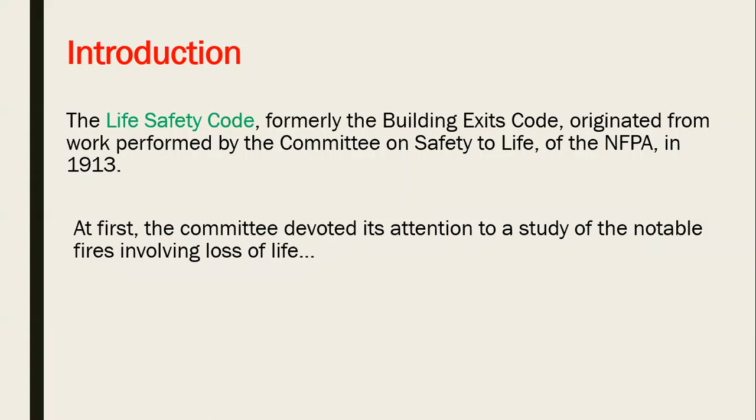At first, the committee devoted its attention to studying notable fires involving loss of life. The purpose of this, in most standards or codes devoted to the subject of emergency egress and exit, is the emphasis on escaping from fire, how to escape from fire, and securing people along the egress or escape routing to get away from the building safely, providing all the requirements to secure a safe journey to escape from buildings.

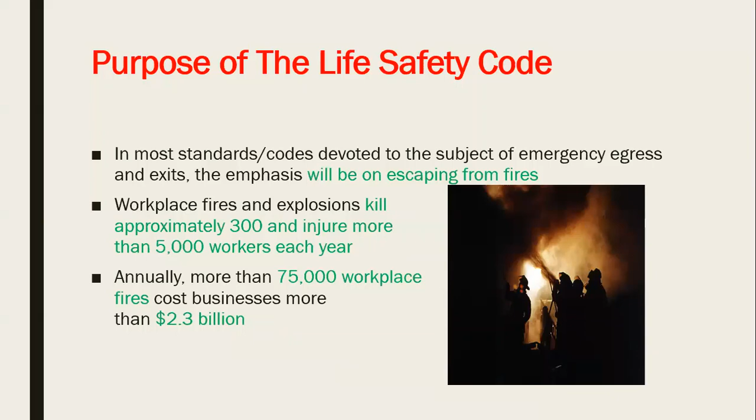Workplace fires and explosions kill approximately 300 and injure more than 5,000 workers each year. It's a big number. Annually, more than 75,000 workplace fires cost businesses more than 2.3 billion. This is statistics as per NFPA for the last editions.

So let us see how to secure the building through escape routing. It is not only for fires, but also for explosions, earthquakes, smoke, and all kinds of danger to buildings.

The NFPA code, the purpose of this and the advantage of NFPA, why it exists, is to provide the minimum requirements with due regard to the function, design, operation, and maintenance of the building and structure for safety from fire. So this gives you the minimum requirements.

And many authorities and departments of civil defense in countries ask for higher requirements than NFPA. So NFPA is the minimum requirements, but we can find higher specifications or requirements from civil defense authorities in different countries.

Here in Qatar, they say we are complying with NFPA, the latest edition, and QCDD, which has higher requirements. So if, for example, NFPA requires 2-hour fire rating, but QCDD asks for 3-hour fire rating, we have to go with QCDD's 3-hour fire rating, for example.

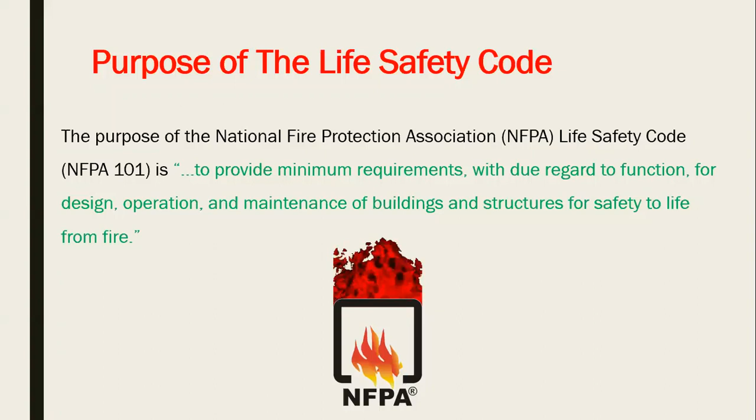The latest edition of NFPA 101 is the 2018 edition. This is the cover of the NFPA 101 section. By the way, for NFPA, you can buy it in full editions, or you can buy it chapter-wise.

Okay, let us go for NFPA 101. This one is the most state-of-the-art in terms of egress requirements, stair marking, and emergency lighting. So it talks about securing the egress starting from the stairs and emergency lights, current accepted rules concerning smoke barriers, special hazard protection, interior finishes - and we will talk about all of these points right now.

It has updated references to more than 50 codes and standards such as NEC, NFPA 13 for installation of sprinklers, NFPA 72, and others. All of these sections are related to life safety. But here, NFPA 101 is mainly talking about egress routing and escape routing.

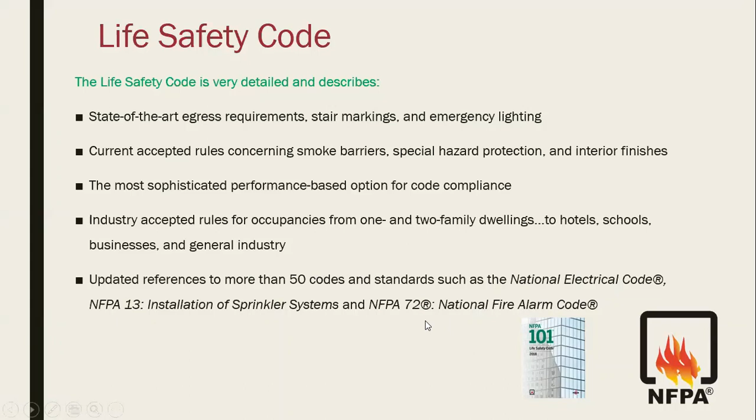NFPA 101 is more than 400 pages with 43 chapters. As you noted for the QCDD, they are talking about specific chapters within the NFPA 101 itself.

Our chapters for study will be chapter number 4, general; chapter number 7, means of egress; and chapter 40 for industrial occupancies, section 40.2 means of egress requirements. So these are the main 3 areas where we are going to talk about the NFPA 101.

What is the means of egress? The means of egress is the escape routing that we can secure within the building, allowing people to escape away from the building in a safe way.

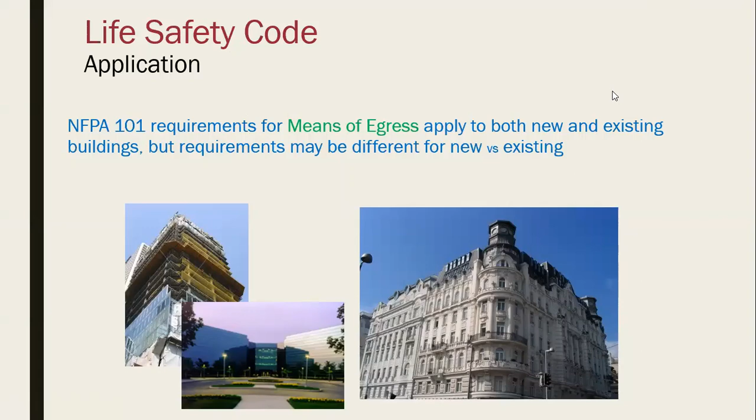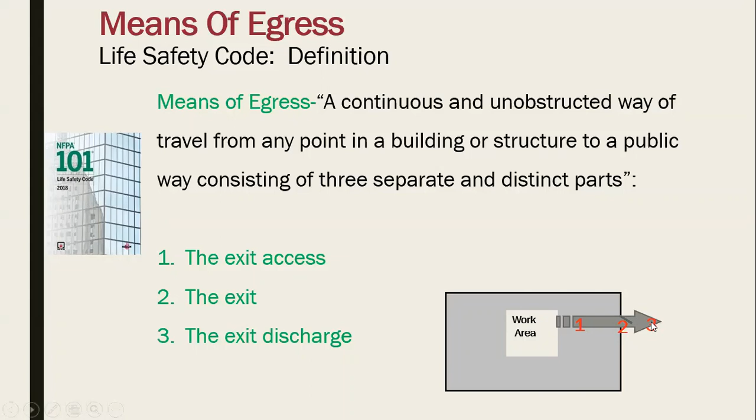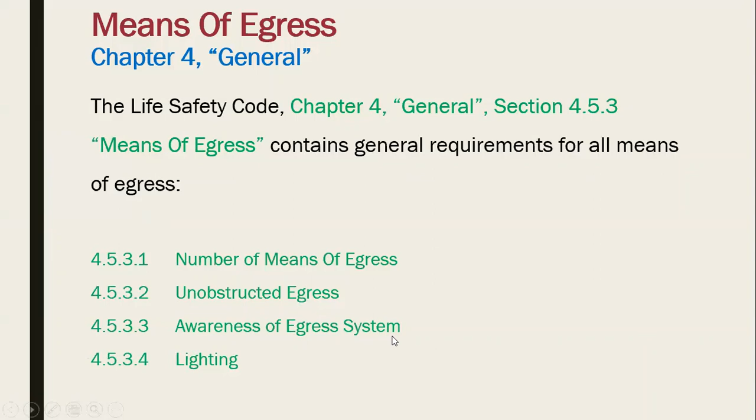Chapter number 4, which is general, will talk about the general concept of the means of egress: 4.5.3.1, number of means of egress, unobstructed egress, awareness of egress systems, and lighting.

Do you remember for the QCDD when we talk about the number of means of egress? We said it could be only one exit with some conditions, or two up to how many persons, and three up to, and four up to. Still remember?

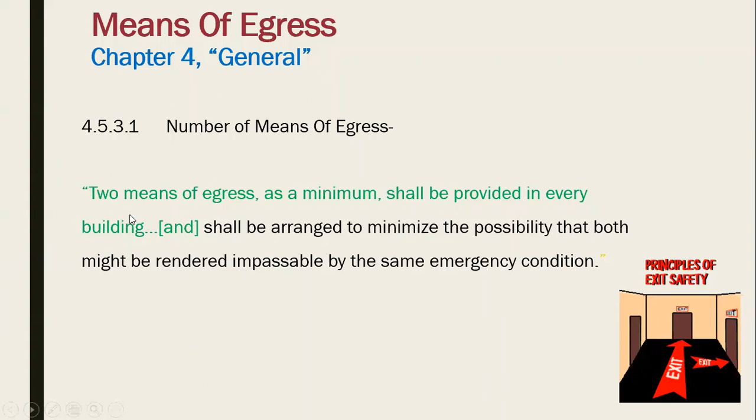Minimum number of egress is minimum 2, and this minimum number shall be provided in every building and shall be arranged to minimize the possibility that both might be rendered impassable by the same emergency conditions. So the minimum number of egress anywhere is 2, but QCDDs can accept one under certain conditions.

The means of egress should be maintained unobstructed at all times. You shouldn't have any blockage, any lock within the area, any storage or furniture, whether movable or loose furniture. It is not allowed to have any kind of furniture within the route of egress.

The means of egress from all parts of the building shall be maintained free and unobstructed. No lock or fastening shall be permitted that prevents free escape from the inside of the building. So any kind of lock is not allowed.

But we have an issue here. Many areas within the egress routing, like for example for corridors, malls, or hotels, you have an area for the exit and the exit stairs. It comes almost within the back of house area, where you have maintenance rooms, electrical rooms, etc. So these areas, you are not allowed to let the public access the back of house area, for security and to control the movement of public people within the buildings.

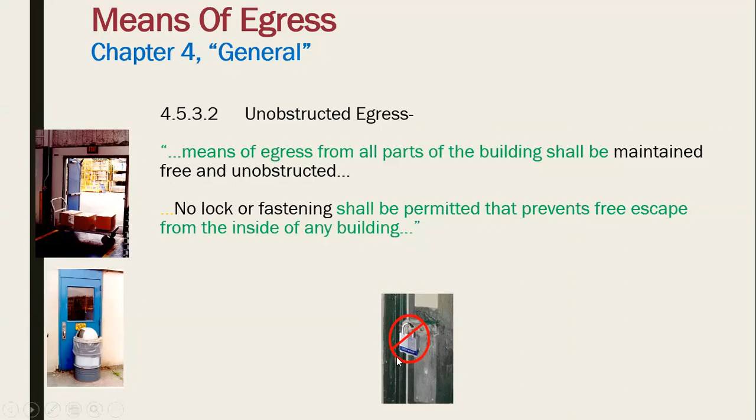So how to maintain this? As per NFPA, doors shouldn't be locked, but it is permitted under the condition that it is connected to a fire alarm system. Physical locking, like a padlock, is not allowed at all.

Awareness of the egress systems: you have to clearly indicate the exit routing, where it is and how to reach the egress area and escape routing within the building and the open space. So everywhere you have an exit and escape routing, it has to be clearly visible, and the route for every exit shall be continuously indicated.

Conspicuously indicated, which means for any exit door or exit routing, you have to show an exit sign, and it should be visible within an area not exceeding a distance of 30 meters. It has to be clearly indicated, and the text and height have to be clearly shown.

It should be illuminated. You have to show the exit, and if there is a change in direction, you have to indicate exit signs giving directional guidance for the exit. Now we'll see what the NFPA requirements are for exit routing and directional arrows.

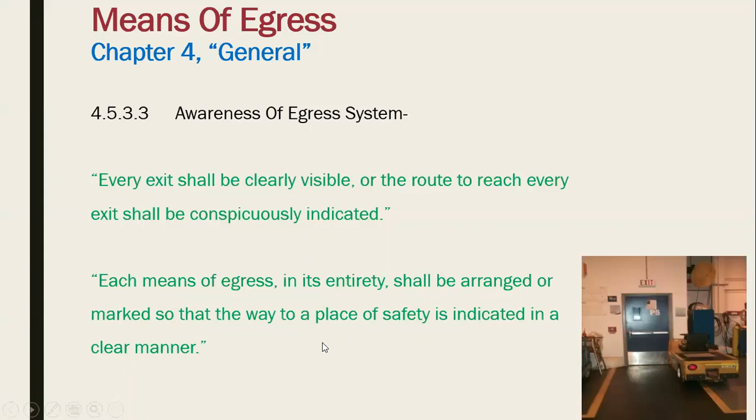This is the life safety chapter, section number 4, which covers general awareness of exits and the number of means of egress. We will give you tables that can calculate the number of egress routes depending on the occupancies.

Moving to chapter number 7, which is the core of NFPA 101, called the means of egress, consisting of 15 sections.

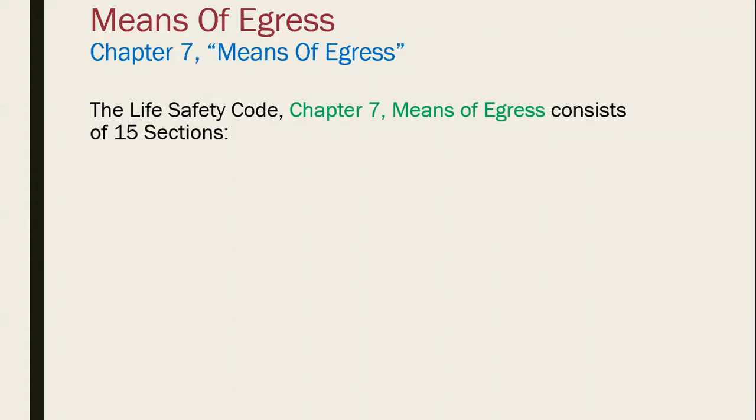First, in general, what is the means of egress? Second, the components of the means of egress. Capacity of means of egress, which depends on the number of occupants. Number 4, number of means of egress, how to calculate and identify it. Number 5, arrangement of means of egress, where it should be arranged within the building.

The measurement of traveling distance to the exit, how to calculate the traveling distance, and what the limit will be for the traveling distance. Do you still remember what the limits for traveling distance are as per QCD?

In case of non-sprinklered or sprinklered buildings, who has a good memory? You need to remember these figures, guys, to help you answer the questions within the exam.

Otherwise, you have to know which section to reach. The purpose here is not to explain the NFPA in full detail, but to focus on the areas where the QCD exam questions come from, and to assess how you can reach the correct answer and information from the NFPA to answer the QCD questions. You should know how to get the information quickly, unless you remember it carefully.

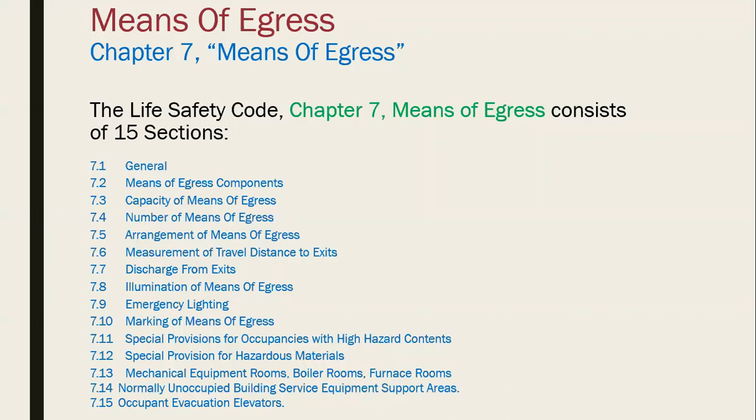So this is 15 sections within chapter number 7 itself. You can see how heavy it is and how it covers all the requirements related to the means of egress. Let us go one by one.

The exit access corridors, where the corridor used as an exit access, shall be separate from other parts of the building by walls having not less than 1 hour fire resistance rating. So the corridors have to be separate from all other areas of the building and secured, and the enclosure for this corridor has to be minimum 1 hour fire rated.

The corridors could be part of the building, within the circulation of the building, definitely. It doesn't mean I have to make a separate corridor and build a new structure. No, it is part of the building, but it has to be dedicated and separated from all other building parts. It shouldn't be running through an office area, tenancy, shops, etc. It has to be dedicated, circulated, and maintained free for access, without any furniture, occupancies, or blockage.

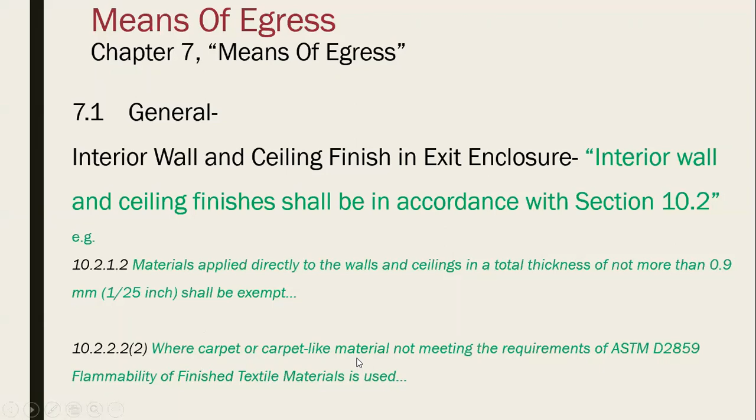Where carpet or carpet-like material not meeting the requirements of ASTM flammability of finished textile material is used, even the carpets and flooring material have to be fire resistant as well, in addition to the walls.

What about the headroom, the height? The headroom for new construction buildings, for any building under design and new construction, the means of egress shall be designed and maintained to provide a headroom not less than 90 inches, with projection from the ceiling not less than 80 inches. This is for new construction buildings.

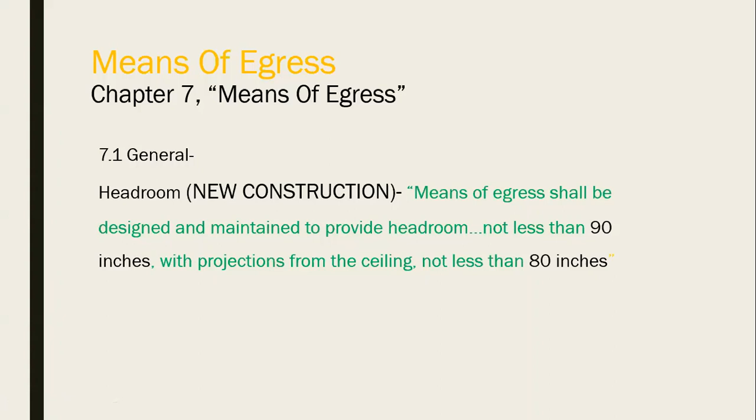What about all the buildings already constructed where the regulation at that time was different? They are allowing for existing construction, for renewal of the civil defense license, it could be relaxed to a height not less than 84 inches and projection from the ceiling not less than 80 inches.

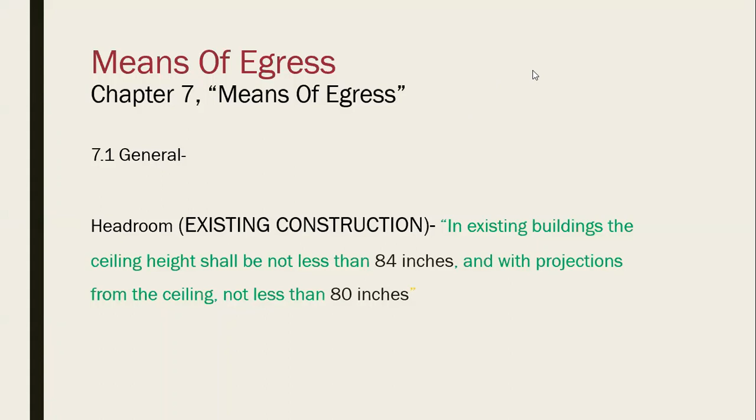Another important point for the means of egress is maintaining the smooth movement and the surfaces for the means of egress. What does it mean? During escaping in case of fire, people are scared, panicked, and running. So you have to maintain the egress route free from any obstacles or materials, and maintain floors smooth for easy running and escaping, which means any change of elevation or levels has to be well indicated.

Changes within 1/4 inch and 1/2 inch should be beveled 1 to 2, making it smooth. Any change exceeding 1/2 inch, you can imagine 1/2 inch, 1.25 centimeters or less, shall be considered a change in level. What does a change of level mean here? You have to treat it like a step, a changing of level.

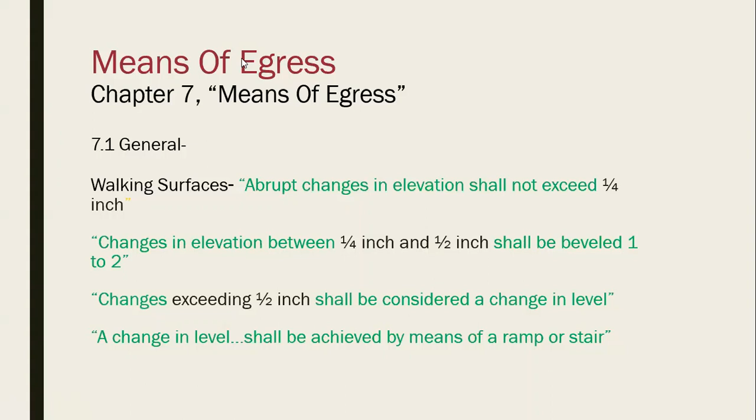The other point for the means of egress: all the furnishing and decoration in means of egress, no furnishing or decoration or other objects that obstruct the exit and the access to the exit, therefrom and visibility thereof. What does it mean? It's not allowed at all to have any furniture or decoration which can obstruct the exit itself and the access through it, the egress, and even the visibility through it, which means the exit doors have to have a feasible window so you can see through the exit doors itself.

What about the door itself? The minimum door width has to be 32 inch in clear width, a clear width, not considering the frame and the hinges of the door. It has to be 32 inch clear. So this is the doors.

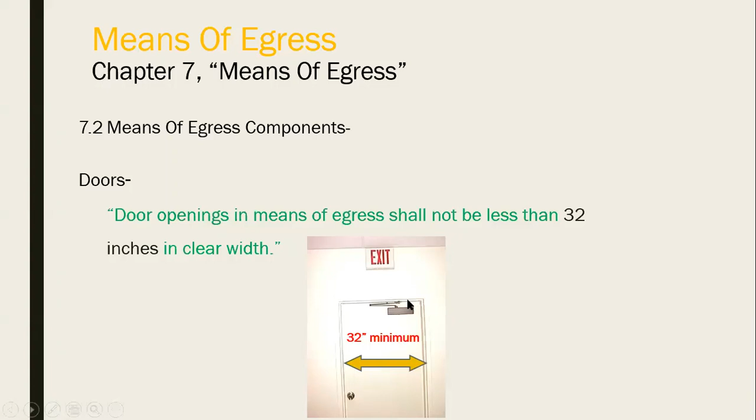Some exceptions for the door width: if it is connected to a room which is less than 70 square feet, 7 meters square, it is not required to be accessible to a person with severe mobility impairment and shall not be less than 24-inch leaf width. So if it is a room less than 7 meters, it is acceptable to be 24-inch instead of 32-inch.

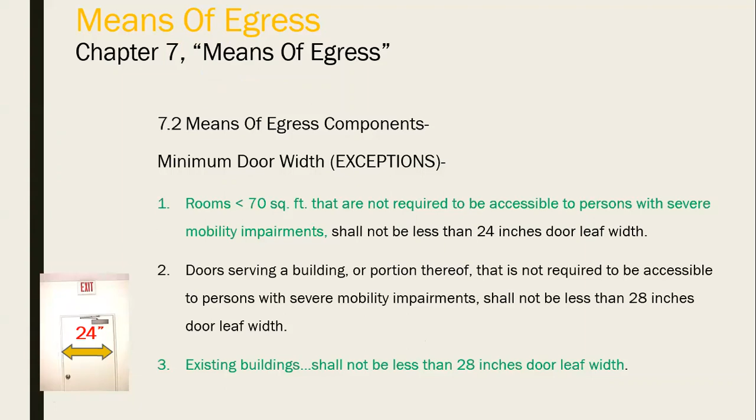If you have an exit door with a double leaf, if it is two leaf, double leaf door, at least one leaf of these two double leaves should be open in the exit routing, and it should have indication with a bar or sign that this leaf of the double door leaf is for exit, and the width of this leaf should be not less than 32 or 28 or 24 inch, etc. Okay, so this is for the exit doors.

The doors itself should be side hinged or pivoted swing type, shall swing in the direction of travel. So it has to be side hinged from one side, or if it is a swing, it has to be with the direction of the travel distance, for those serving a room or area with an occupant load of 50 or more. Okay, so this one for the door.

What about sliding doors? What about revolving doors, rotating doors? The exit routing and escape routing, have you noticed before - it could use swing doors. The sliding doors and the revolving doors could be used within the escape routing, but with conditions. What are the conditions for this one? A sliding door is moving horizontally. In case of escape, it has to open directly in the direction of the exit. So the condition for NFPA 101 to have sliding doors is that the sliding door has to be fire rated as well, with a minimum of 1 or 2 hour fire rating depending on the zones. Number 2, the sliding doors have to be equipped with a double mechanism - in case of fire, the sliding door has to have a double mechanism.

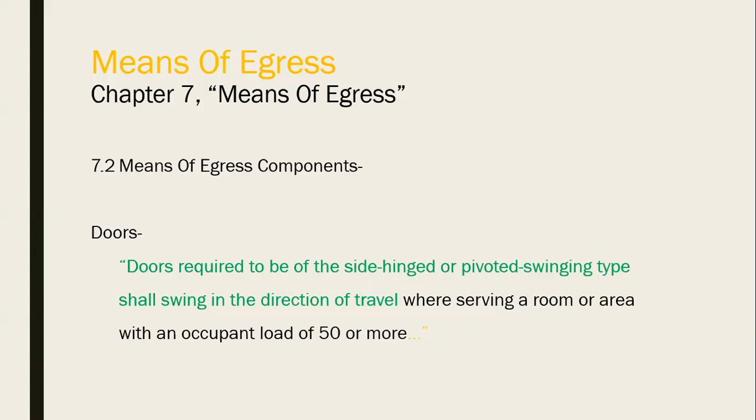If it is swing doors, it should swing in the direction of the egress travel under either the following conditions: where the door is used as an exit enclosure, and where the door serves a high hazard contents area. So these swing doors could be considered within traveling doors, opening in the direction of the egress, when used within exit doors and when serving high hazard contents areas.

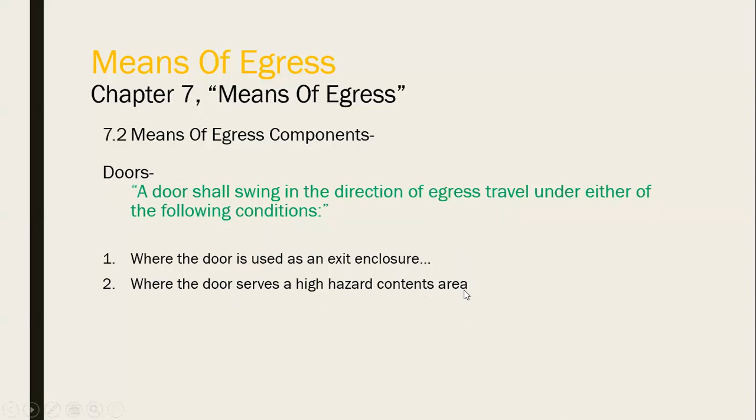The other components within the means of egress are the locks, latch, and alarm devices. The door shall be arranged to be opened readily from the egress side whenever the building is occupied. So it has to be allowed to open in the direction of the escape and egress routes when the building is occupied.

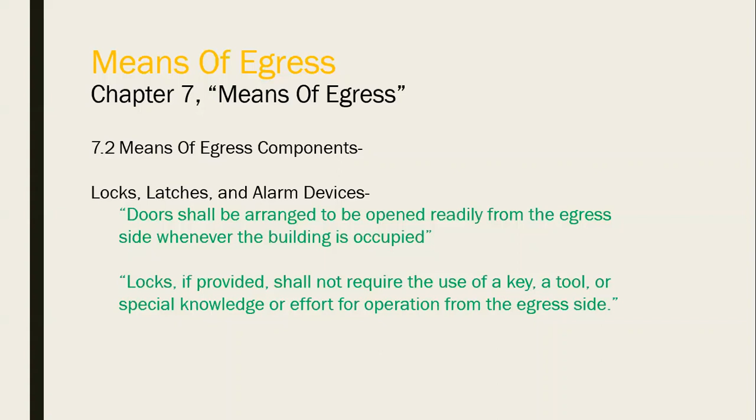Locks, if provided, like access control, magnet locks, card readers, PIN card opening and locks, shall not require the use of a key, a tool, or special knowledge or effort for operation from the egress side. Which means any lock should not have a key, just magnetic locks or card readers connected to the access control panel, and the access control panel will be reset completely for the building whenever there is a fire, allowing the people to use the egress door.

Exit, which we call the panic bar. The panic bar, which is installed on the exit, has to be one half of the door to open it by maximum 15-pound force.

The 15 pounds force bar has to be tested. This is one of the points civil defense will check when they come to inspect the building, they will inspect the force to open the door, if it is connected to a staircase pressurization fan, to measure the pressure.

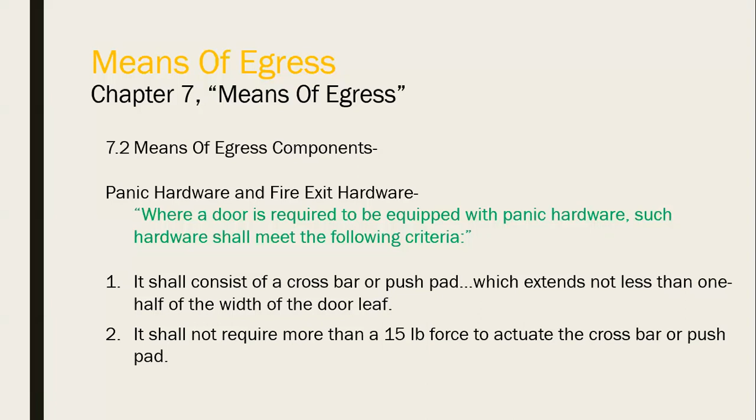The stairs itself is the other component of the egress. So we talked about the door, the width of the door, dimension, the force required, and the panic bar to be installed.

By the way, for the inspection of QCD and materials, when you are submitting for QCD inspection, all of these components have to be certified by QCDD, which means all of these fire doors have to be from a certified manufacturer, tested, and having certification for the fire rating, if it is 1 hour or 2 hour, etc. QCDD certifies the door as a system, including the hinge, the locks, and the handle, everything. So you have to provide for the egress doors and emergency doors, whatever fire rated, to be certified from QCDD, including the door closer, including the panic bars.

Panic bars will be an accessory fixed to the door itself, so it is coming from a separate supplier. What you have to do for this is get the certificates and install the doors from a certified manufacturer with the fire rated certificates from civil defense, and each door should have a tag number and serial number from the manufacturer, and it is a unique one. You have to submit all of these documents to civil defense.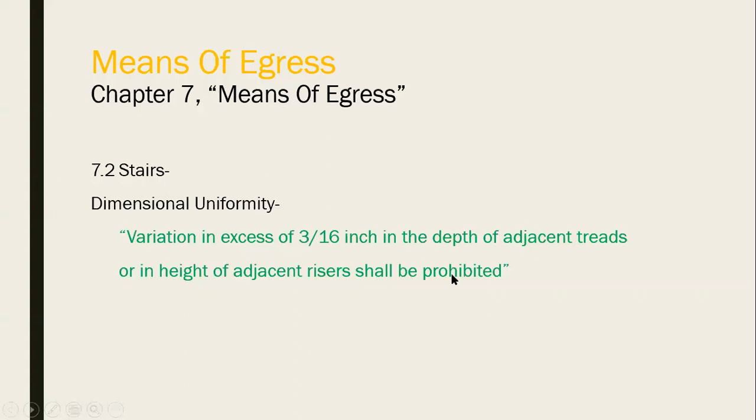The stairs itself, if there is a variance in the levels, it should not exceed 3/16 inch in the depth of adjacent treads, or the height of adjacent risers shall be prohibited to avoid any change of levels. The stairs should have a handrail on both sides, one handrail wall mounted, and the other one fixed to the edge.

This handrail, as per code, doesn't allow any projection from it, otherwise it will engage the clothes of someone running. So this is not allowed at all. It has to be very tight and continuously connected, and if it goes to the wall, the handrail has to be completely connected to the wall.

So the design of the handrail shall be such that there are no projections that might engage loose clothes from people. New handrails shall be continuously graspable along their entire length.

I remember one of the projects I had, in the civil defense inspection, the designer and the manufacturer for the handrail didn't consider it, and he had to take all of the handrails to fix, adjust, and install them one more time.

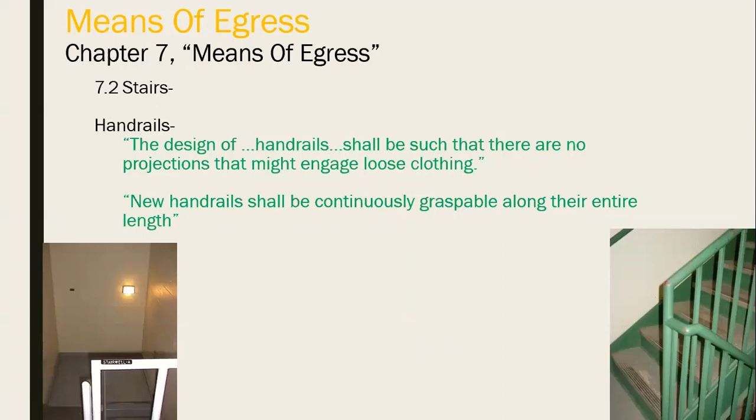So the width - so this is related to the stairs.

Talking about the passageways, the width of the exit passageway shall be adequate to accommodate the aggregate required capacity of all exits that will be discharged into it.

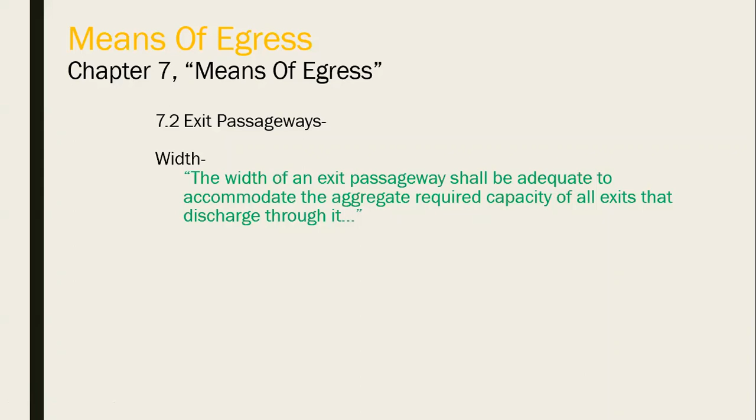So how to calculate it? It is not required from the mechanical engineer to know how to calculate the width and the occupancy from the corridors, etc. But you need to know where, if required, the table is so you can get the calculation quickly. I will share with you the table for how to calculate the width of the escape routing and the number of exits as well.

Capacity of the means of egress has to be adequate, and the area of the means of egress must be calculated so it can accommodate the persons within the escape routing.

So the total capacity of means of egress for any story or other occupied space shall be sufficient for the occupant loads. The occupant load shall not be less than the number of persons determined by dividing the floor area by the occupant load factors. This would mainly be for the architect, designer, or life safety engineer to calculate the widths of the corridors and the number of occupants and how many people will be occupying the building.

This will be related to the architect themselves, but as a certified QCDD engineer, you should be aware of how to calculate it, what the requirements are, what the factors are, what the load factors mean, and where it is presented within NFPA 101. I will share with you these tables for information.

For industrial area, they calculate 100 square feet per person, so 10 square meters for each person within the occupancy area.

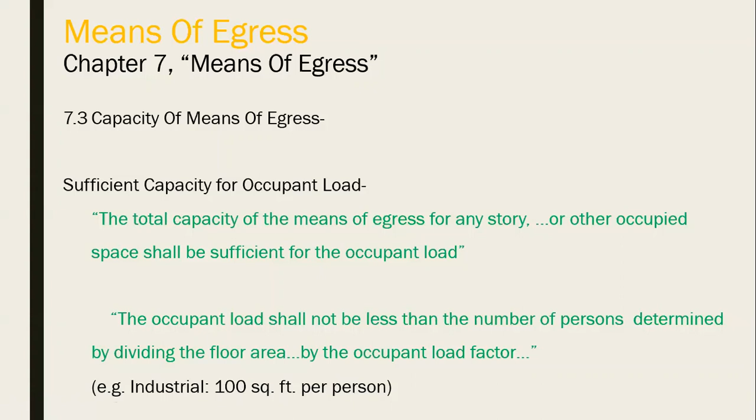Number of means of egress: in general, the number of means of egress shall not be less than 2, as we stated before. For occupant load more than 500 but less than 1,000, it is 3 egress routes. For occupant load higher than 1,000, not less than 4.

And by every 500 each, it means that you have to add one more egress routing.

So this is the area of NFPA where they determine the number of egress. However, QCDD relaxes the requirements to have one means of egress, especially for apartment areas where you have a single dwelling unit very close to the exit, not exceeding 10.7 meters length of corridor, etc.

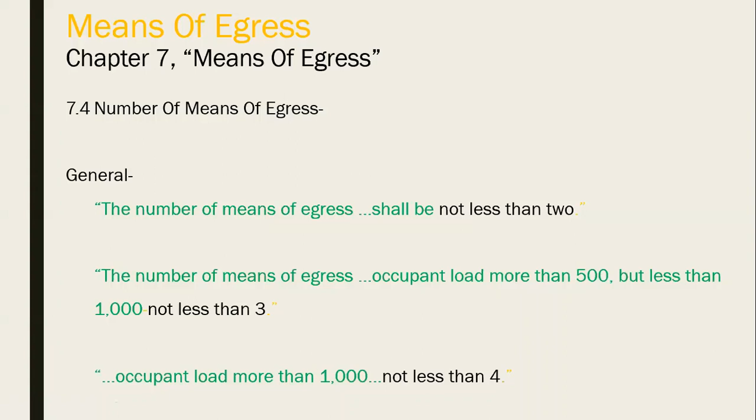Arrangement for the means of egress: it shall be located and the exit access arranged so that the exit is readily accessible at all times without any obstruction.